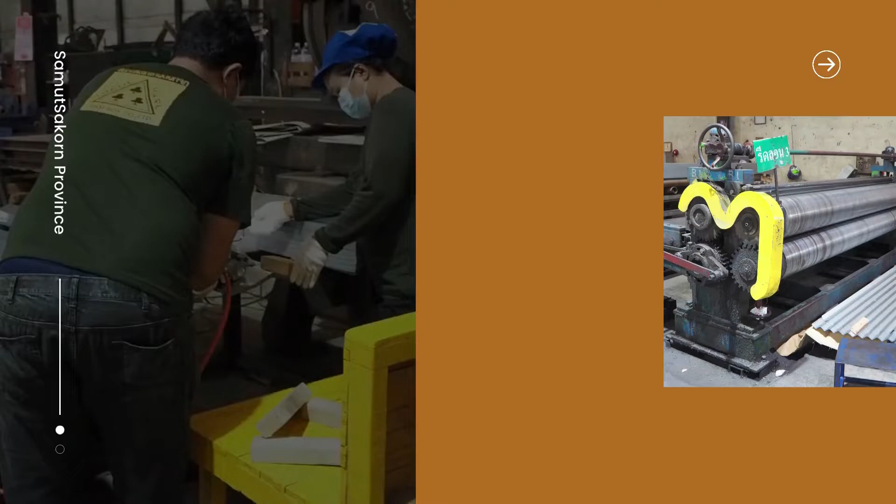Siam Box Company Limited.

The company was established on July 18, 1985. They have been in this industry for over 37 years. The founder is Mr. Nopchok Laobooncharoen.

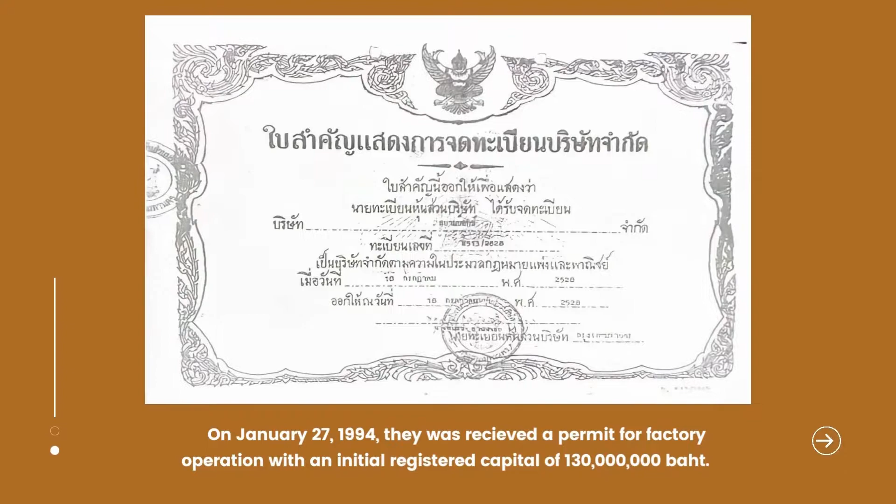On January 27, 1994, they received a permit for factory operation with an initial registered capital of 130 million baht. Currently, the executive is Mrs. Kanya Laobooncharoen. The company has two branches.

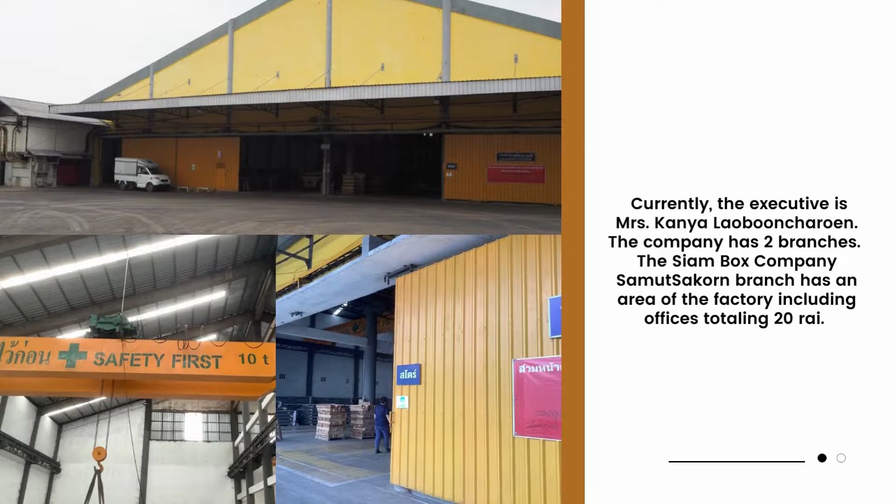The Siam Box Company SamutSakorn branch has an area of the factory including offices totaling 20 rai. Address 73/1 Mu 8, Subdistrict Bang Krachao, District Muang Samut Sakhon, Province Samut Sakhon 74,000.

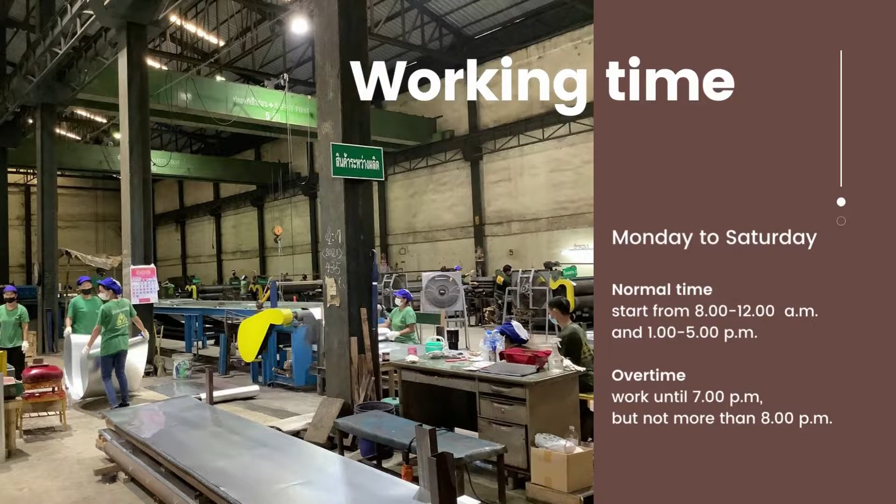Working time Monday to Saturday. Normal time starts from 8 to 12 a.m. and 1 to 5 p.m. Overtime work until 7 p.m., but not more than 8 p.m.

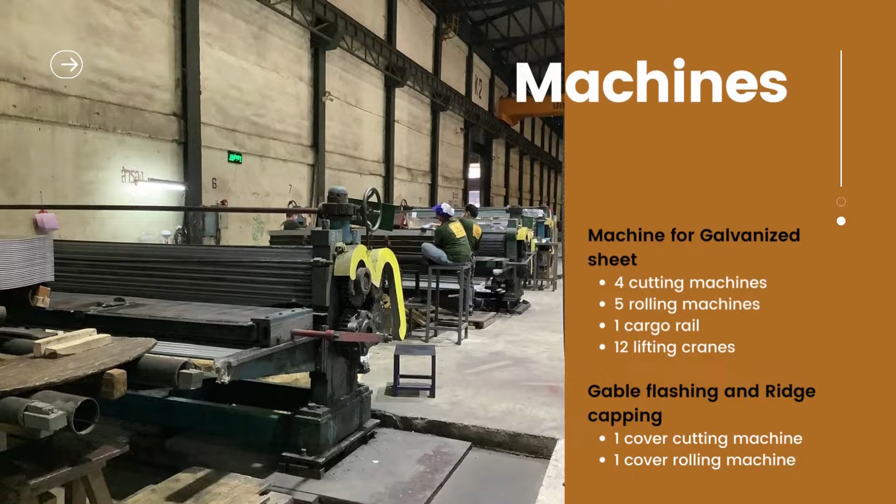Machines for galvanized: 4 cutting machines, 5 rolling machines, 1 cargo rail, 12 lifting cranes, and machines for top cover: 1 cover cutting machine, 1 cover rolling machine.

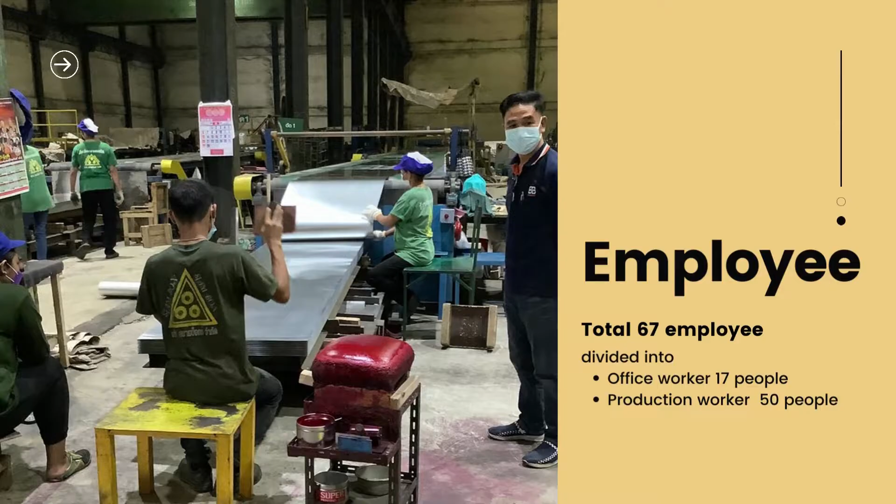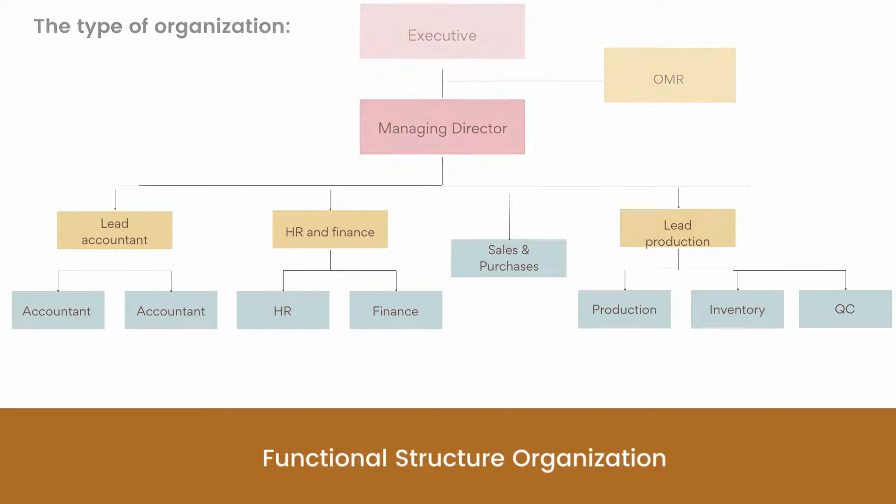Their products are corrugated galvanized sheet 5 to 12 feet, gable flashing, and flat metal sheet.

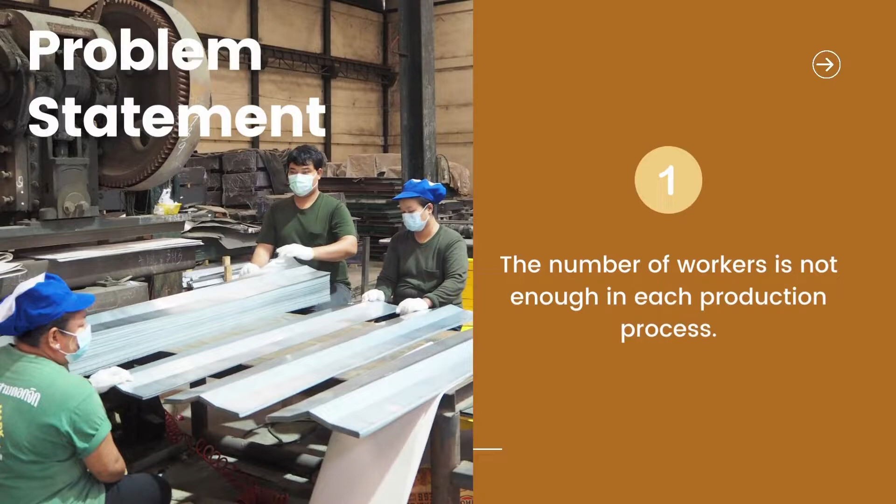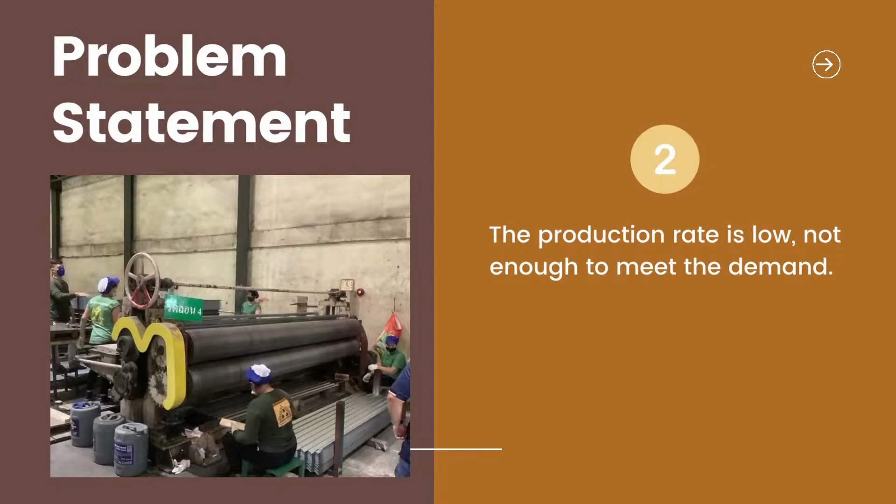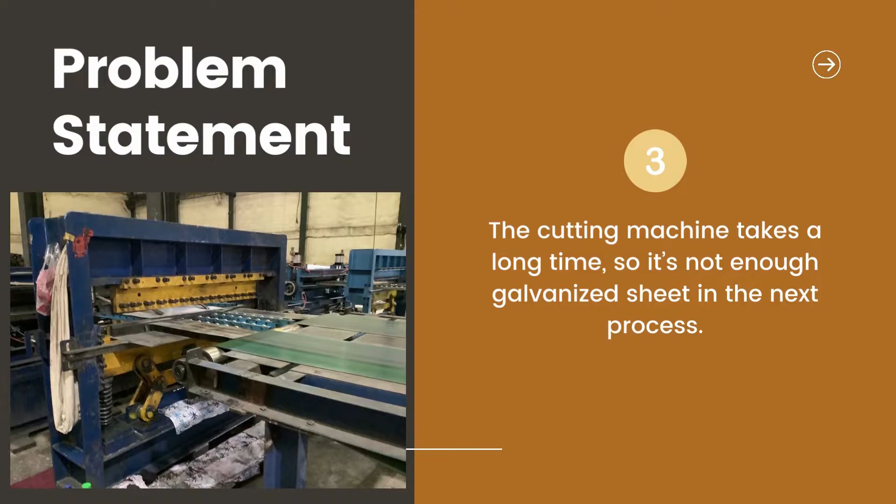Problem statement: 1. The number of workers is not enough in each production process, which is a reason to shut down some machines. 2. The production rate is low, not enough to meet the demand, so employees need to do OT. 3. The cutting machine takes a long time, so there isn't enough galvanized sheet for the next process, which makes the rolling machine stop waiting for the cutting machine.

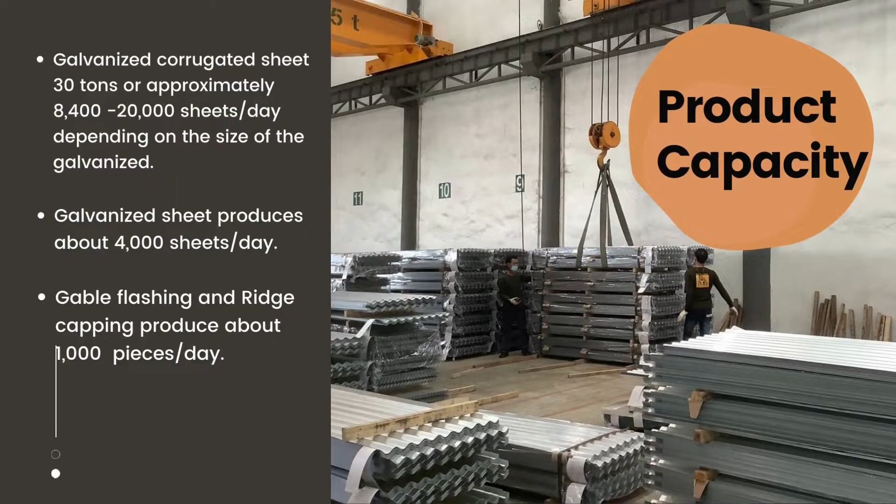The customers are those who do business about galvanized iron and building contractors. Product capacity: galvanized corrugated sheet 30 tons, or approximately 8,400 to 20,000 sheets per day depending on the size. Galvanized sheet produces about 4,000 sheets per day. Gable flashing and ridge capping produce about 1,000 pieces per day.

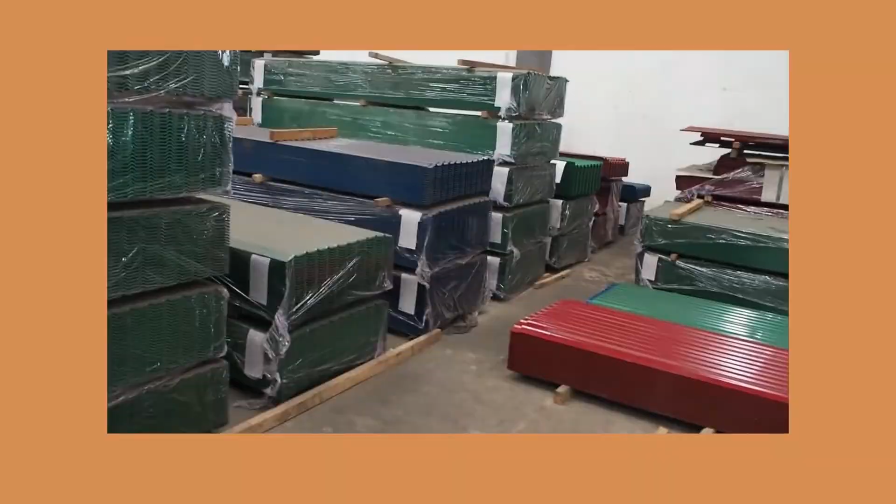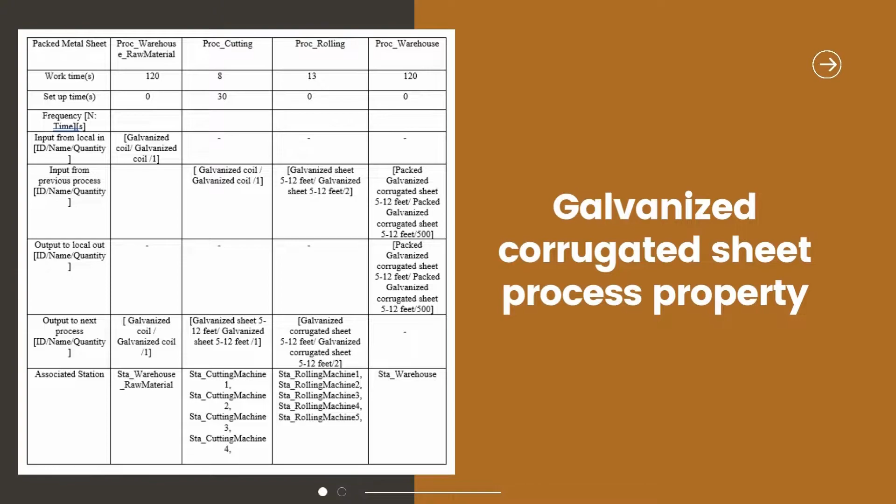This is a process property table of galvanized corrugated sheet. It uses 120 seconds in the raw material warehouse process, 8 seconds in the cutting process, 13 seconds in the rolling process, and 120 seconds in the finished product warehouse.

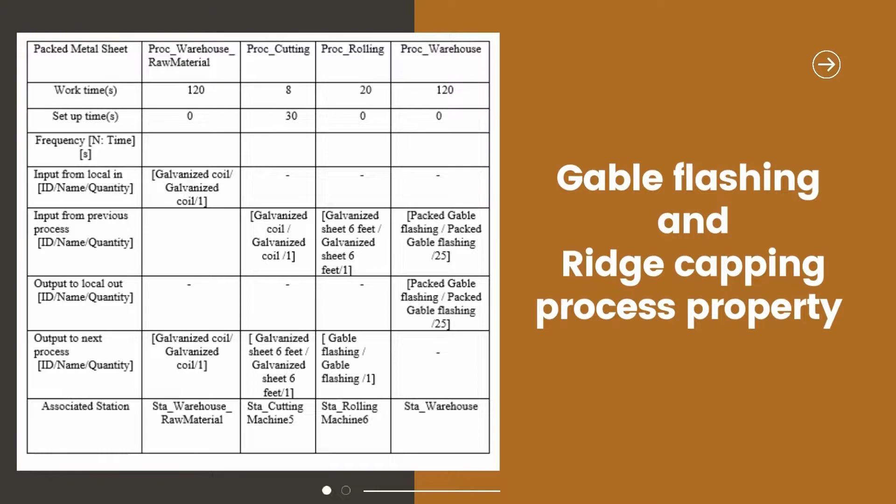This is a process property table of gable flashing and ridge capping. It uses 120 seconds in the raw material warehouse process, 8 seconds in the cutting process, and 120 seconds in the finished product warehouse.

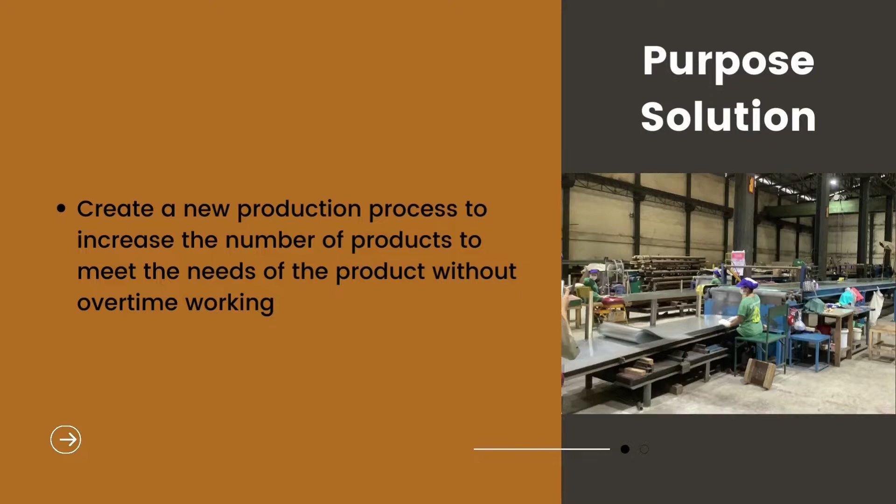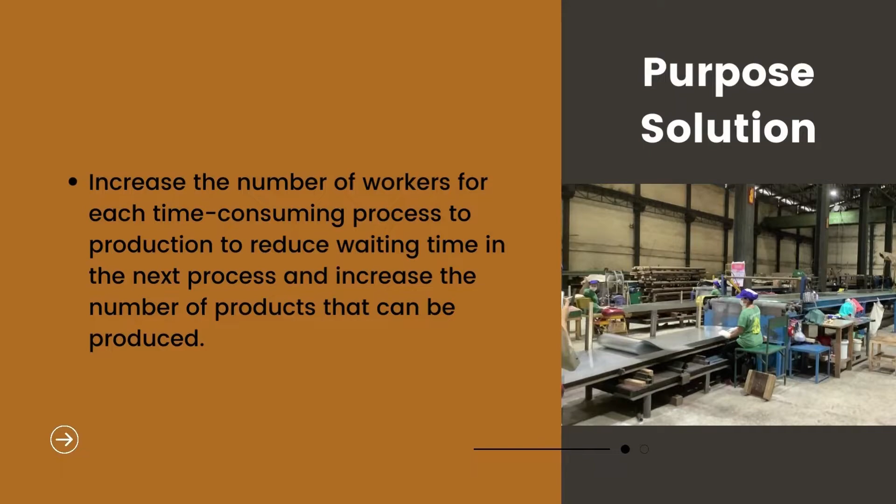Purpose solution: create a new production process to increase the number of products to meet the needs of the product without overtime working. Increase the number of workers for each time-consuming process to reduce waiting time in the next process and increase the number of products that can be produced. Increase the number of machines sufficiently in each production process to reduce the waiting products in the next process.

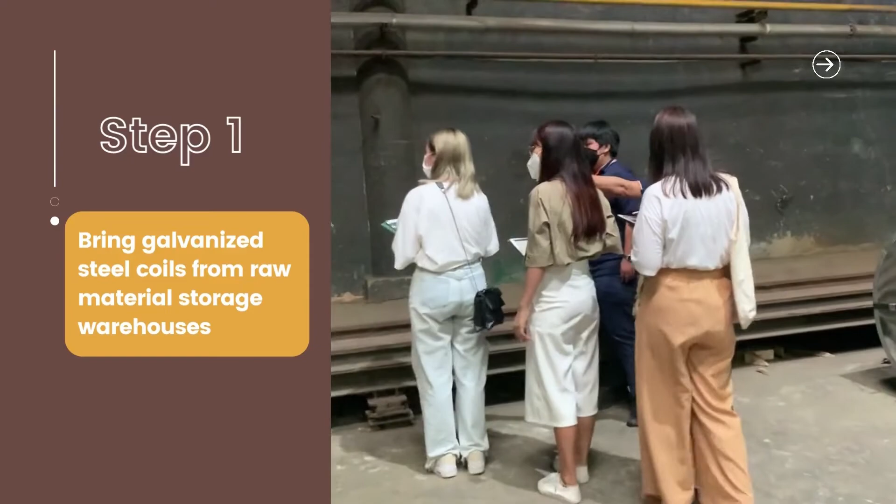Next, we would like to talk about the production process. Step 1: Bring galvanized steel coils from the raw material storage warehouse to the production warehouse by transporting them via rails, to prepare raw materials for the next working process, using approximately 6 rolls of steel in 1 day. 1 roll equals 5 tons.

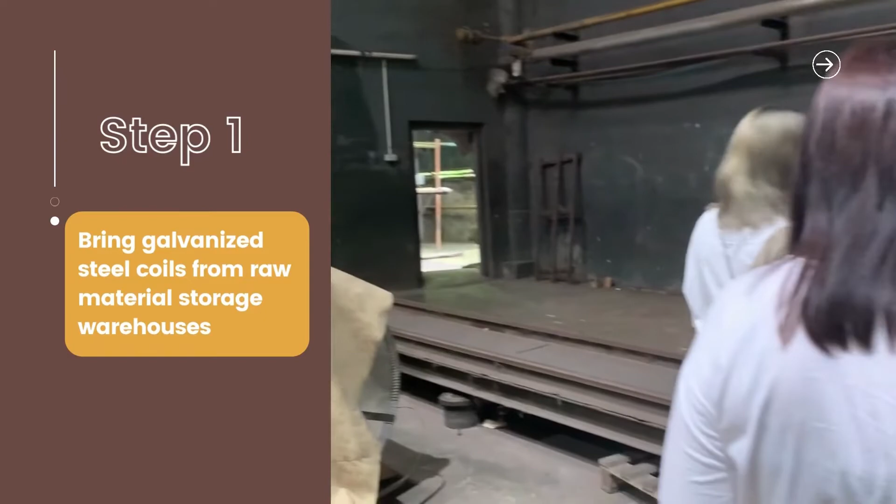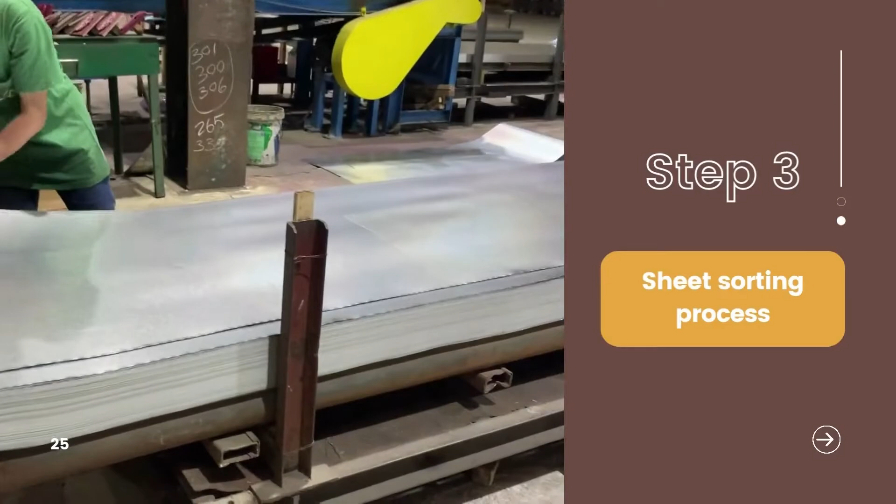Step 2: After that, the galvanized steel coil is taken through the cutting process, starting to set the size of the galvanized sheet. Step 3: Bring the cut steel to the galvanized sheet sorting process, which will separate the defective zinc from the pile to be taken into the next process.

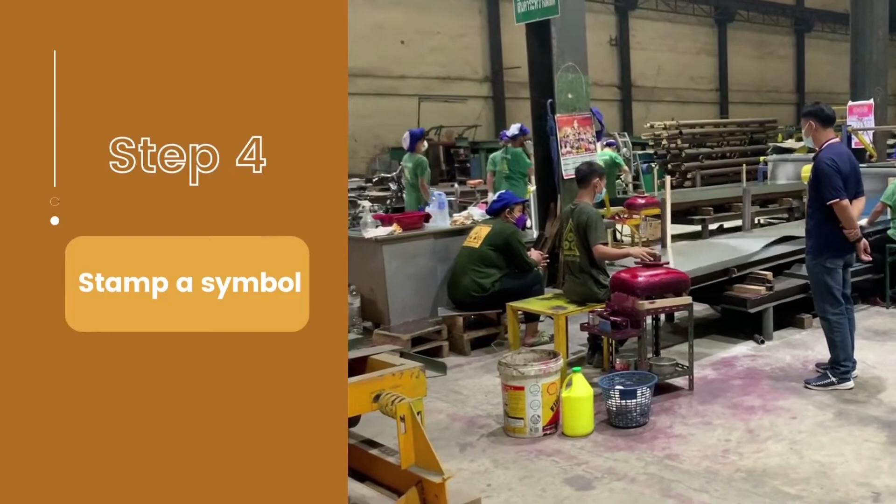Step 4: Bring the galvanized sheet that has been separated to stamp a symbol indicating the type and size of zinc, which is 5 to 12 feet.

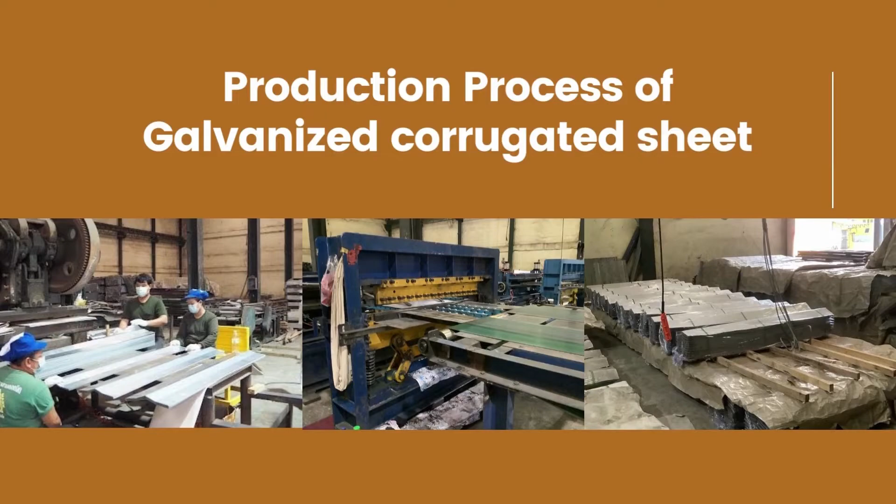Production process of corrugated galvanized sheet: in this process they use the finished flat sheet from the previous process to continue making galvanized sheet products.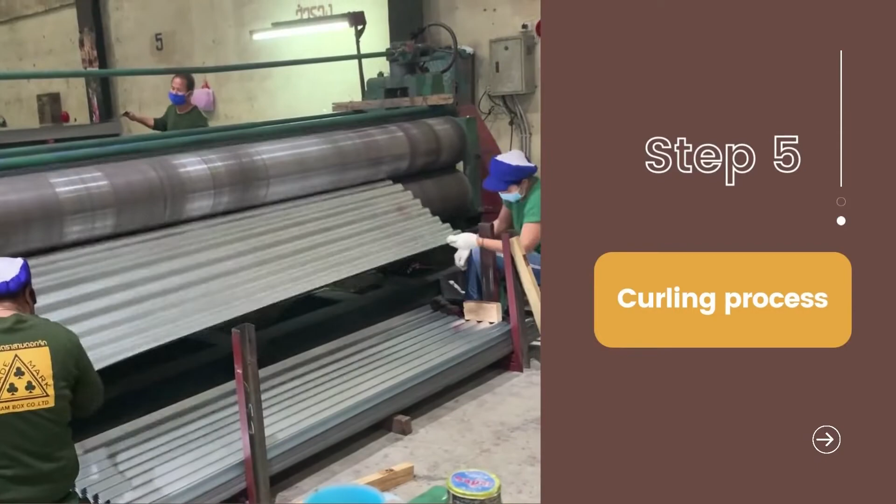Step 5: Bring a flat sheet of galvanized to bend the curls by entering the curling process. Step 6: Separately count the number of galvanized sheets according to the number of orders by one pile. There will be a total of 500 sheets of color sheet.

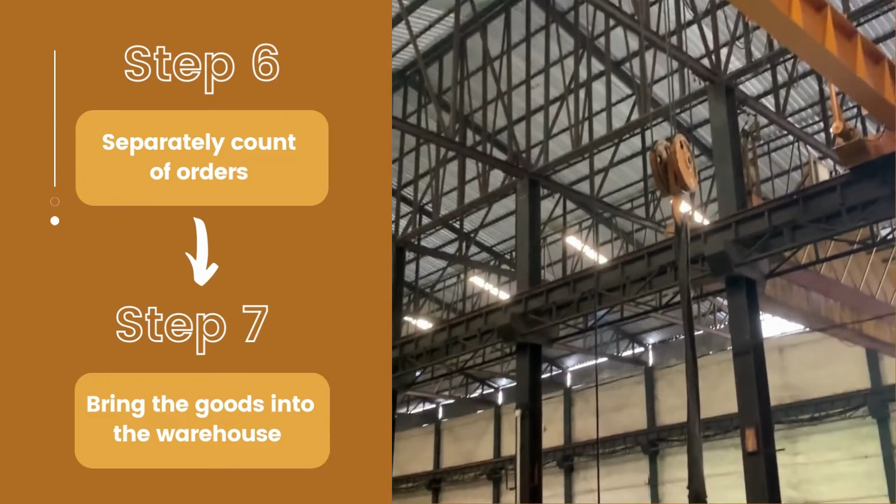Step 7: Bring the goods into the warehouse through the cargo rails. Step 8: Bring the product into the packing process. In one pack, there will be about 2 piles of galvanized in total.

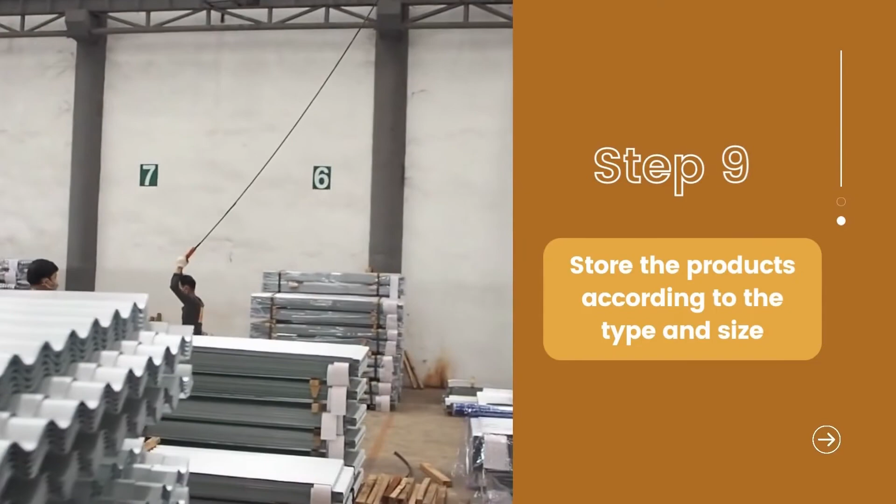Step 9, the last one: store the products according to the type and size, 5 feet to 12 feet. The last process is the production process of gable flashing.

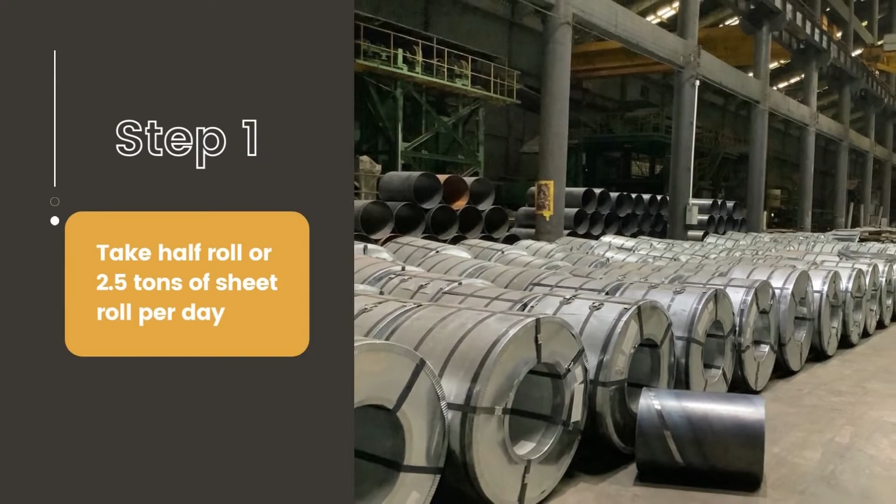Step 1: Take the sheet roll from the raw material warehouse to the production warehouse through the transfer rail, to prepare the raw material for the next working process, using about half a roll of steel in 1 day. 1 roll equals 5 tons.

Step 2: Bring the galvanized sheet through the cutting process, starting to set the size of the galvanized sheet according to the order that the customer wants. They range in size from 5 to 12 feet.

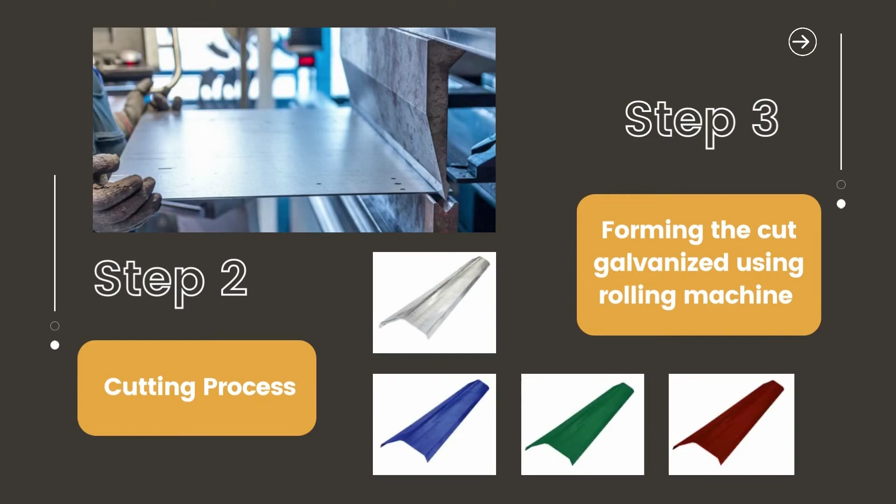Step 3: Take the finished galvanized sheet and form it using a cover rolling machine. Step 4: Bring the finished cover to be sorted according to the number of orders by one bundle. There will be 25 galvanized sheets. Then take the counted cover into the warehouse to prepare for export.